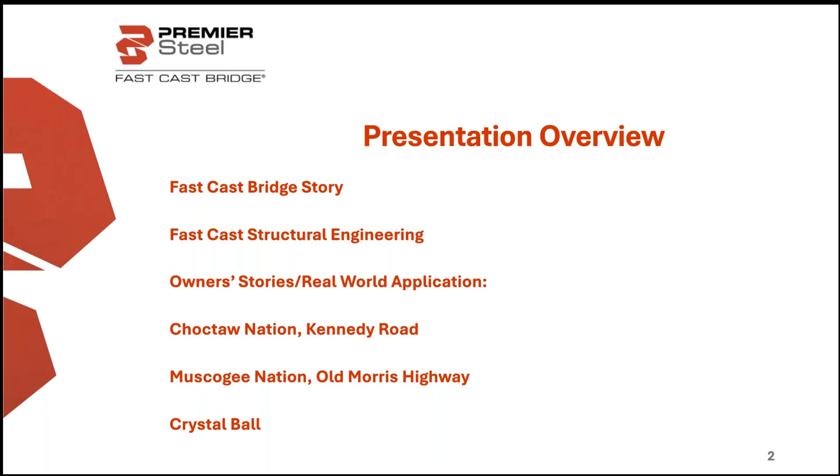Premier Steel Services was established in 2004. We're an AISC certified fabricator that specializes in multi-story construction and composite frame construction across the United States. We're also NQA-1 compliant and have worked at nuclear labs for the duration of our existence. We have federal government experience in national labs, commercial, and tribal projects nationwide. We started in a 43,000 square foot facility and are now up to 120,000 square foot with approximately 40 plus employees. Chris, you want to introduce DCI Engineers?

Yes, thank you, Andy. DCI Engineers was established in 1988, founded in Seattle. We now have a national footprint with offices across the United States. We are a structural and civil engineering firm doing services throughout, including niche services like heavy industrial, right-of-way, and sustainability. We have both a building division and a bridge division.

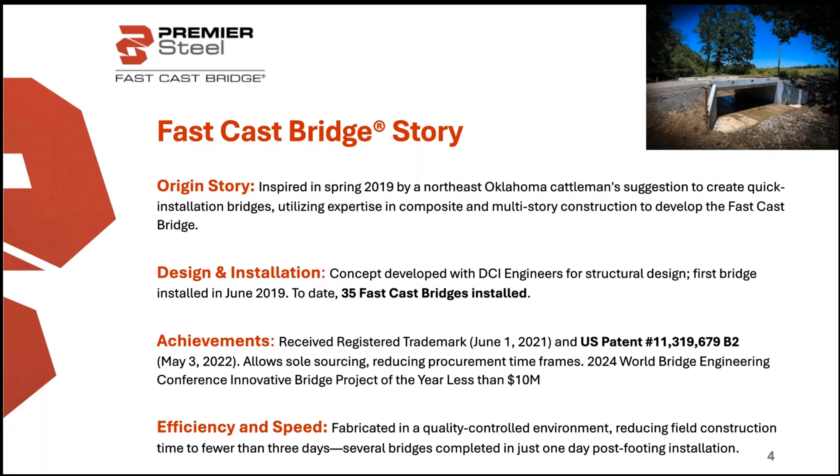So what the fast cast bridge is, in layman's terms, it would be a flying steel form system that stays in place, where you get the speed and performance of steel, the tolerances of steel, and the performance of concrete together.

We partially precast the tub girders to eliminate the necessity of shoring, which the walls will support. Because we're modular in our design, we can add bike and pedestrian lanes, varying edge conditions, water gaps. We've partnered with Green Frog Solar and now offer solar street lighting packages. One of the unique things is we're able to do head walls or wing walls, and angles don't really bother us—it's just a degree on a press brake.

Our steel outer shell basically protects the concrete from any environmental damage, including spalling. We're coated with a 20+ mil polyamine epoxy, providing approximately 30 years of corrosion resistance, but you can go in and touch it up. It's an immersion paint system, meaning it cures underwater, and it's meant to be underwater. We have multiple additives—it's actually a Sigma Shield 880 PPG coating. We can add anti-graffiti additives, and we're able to cover a variety of paint colors for different counties, states, etc.

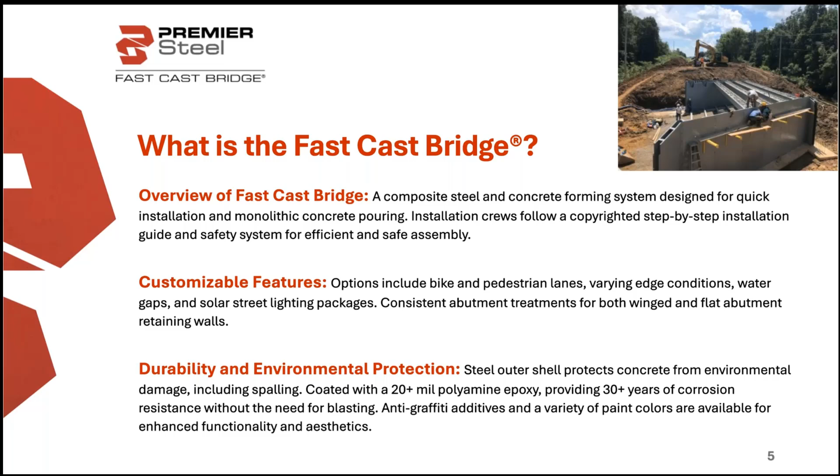The bridge design that Andy and we came up with was again a modular approach. The whole idea was speed, getting this in and out fast in design. So designing that, you need to modularize your design. We came up with spans of 20, 30, 40, 50, and 60 feet. These are all single simple spans that we're going to do, and we try to keep them all the same, fitting everything within a box. Again, the essence is speed.

Everything, bridge decks and beams, use conventional mild reinforcement, so we're not using any pre-stressing. We don't have to worry about any of that, and we try to keep it that way to make things simple, using regular materials that we currently have.

Bridges are designed for various loading categories. Every county, every state, every jurisdiction has their own requirement, and we have to meet that. We have a base design using AASHTO LRFD HL 93 loading and regular vehicle loads, and we can adapt that to whatever specialty need you have, whether it's added superimposed dead load or added specialty trucks, permit vehicles, etc.

As Andy was saying, we partially precast the tub girder, again to eliminate any temporary shoring, for speed of construction. Another idea is that we go through all bolted connections.

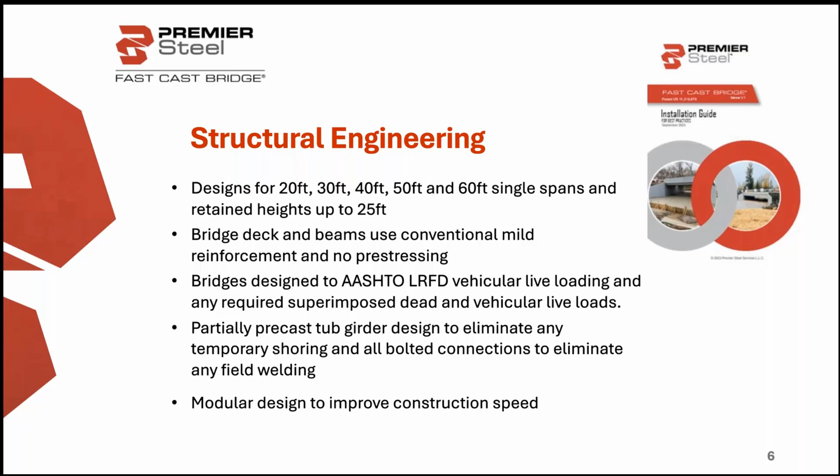Yes, thank you. We do add the intermediate abutment to go for longer spans when needed. And then you also have the bottomless bridge—we are doing ones that do not have a base.

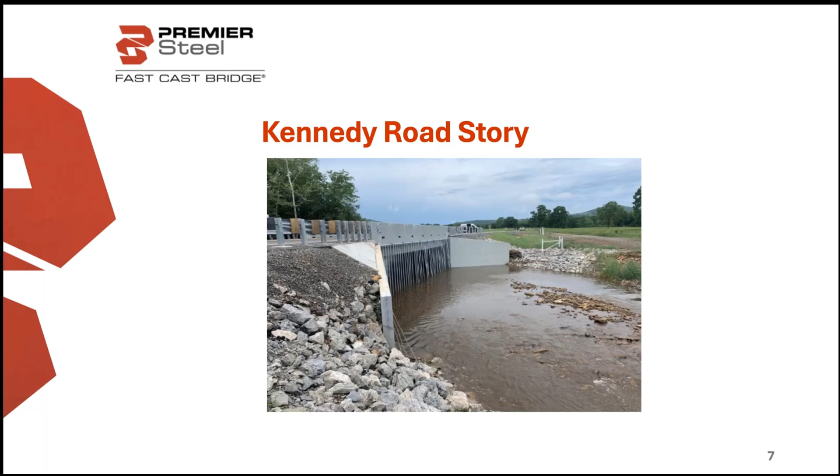The original bridge here was built around 1930 and was on the brink of being condemned. This road was a school bus route, access to 2 rock quarries and many cattle ranches.

When we went up and inspected the bridge and saw the condition of it, we immediately acted with our tribal transportation funds. We were able to go ahead and start progress on getting the bridge design built.

We hired an engineering firm to do all the civil engineering work on the project. Once the hydraulics was done, we turned it over to Premier Steel to get us a design and an estimate back. We actually signed the contract around the 1st of August on this project in 2023.

We started moving forward. We got our general contractor on board. He happened to be a local contractor that actually was the winning bid.

We worked with the county commissioners hand in hand, and we got this thing designed. Andy and them with Premier had it designed within a couple of weeks. We turned the design back over to our civil engineer.

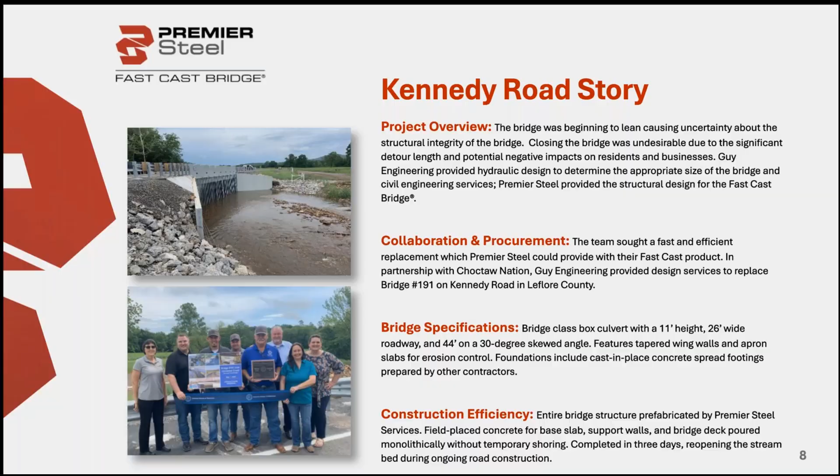Here's the designs, the plans that we received from Premier Steel. As you can see, they're very simple.

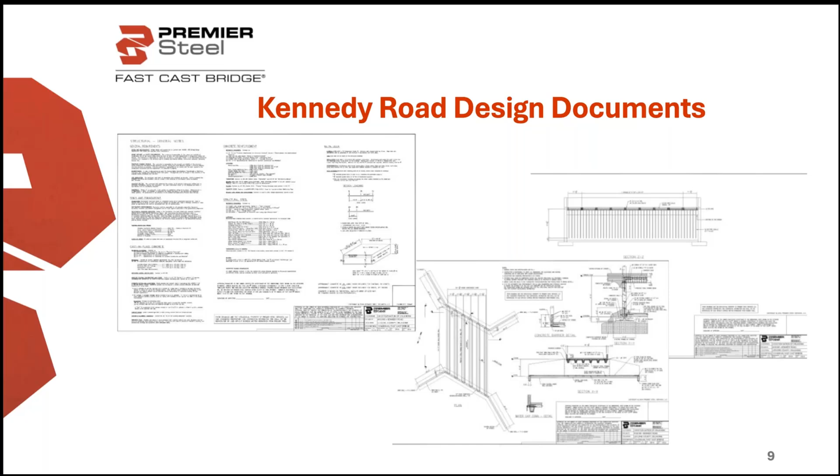As Chris was saying, keep it simple and it'll speed up the time. It did speed up the whole project. We actually cut our construction time by half of what it would take on a normal cast-in-place bridge.

After we got the bridge poured and set in place, our cattlemen in the area have all come by and looked at this, and they just think this is one of the greatest things that ever happened. They like this design. Matter of fact, I think they've even talked to the county about doing something like this on existing bridges.

The contractor, once he got finished with this, the first thing he said to me was, 'We want to do more of these.' So we're working on trying to get more funding to do more bridges in our reservation area. And Premier Steel—I'll be honest, we looked at other bridge packages, but they just didn't fit the need that Premier Steel provided to us.

We're very satisfied with it. We're satisfied with the time savings, because it cuts down on detour. The detour around this project was about 14 miles. We've also got a couple of rock quarries whose semis come across this bridge on a daily basis.

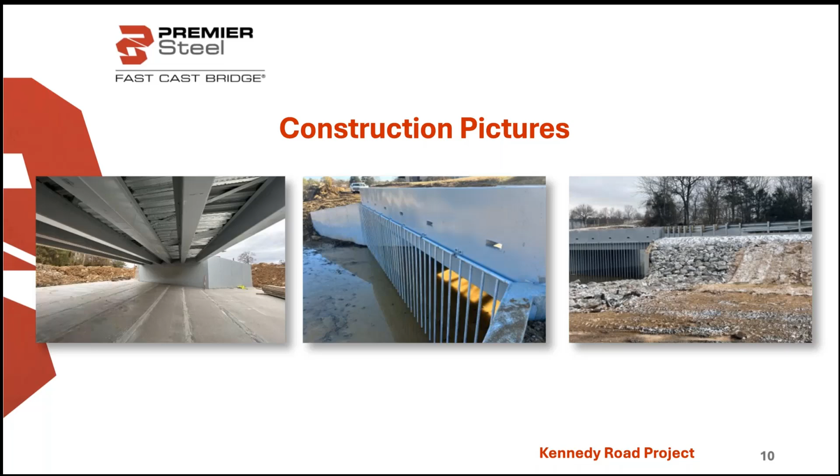I could go on and on about how well this thing has performed for us, and we're doing more projects with it. We think it's a great product, and like I said, we will be using more. Right now we've got a couple of the head walls sitting on the ground waiting to be installed that they designed for us. Back to you, Andy.

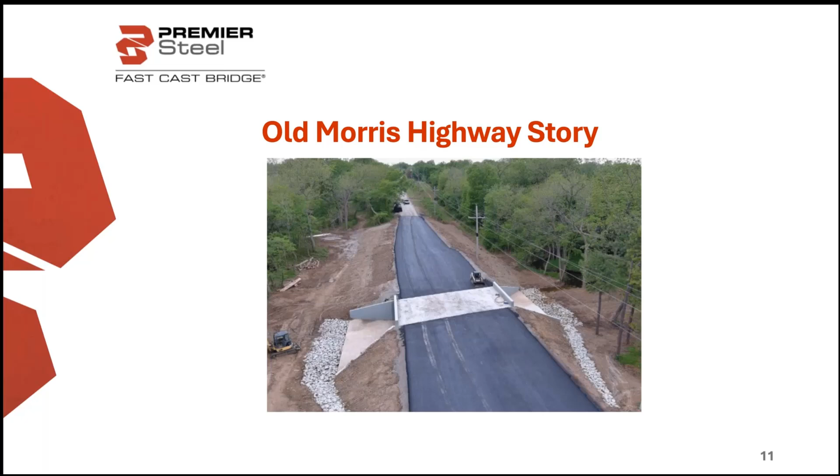I'm going to talk through the Old Morris Highway story. We had some flood events that washed out a multi-culvert structure within the Muscogee Nation reservation boundaries. The Muscogee Nation has bought in excess of 9 fast cast bridges from me at this time. They contacted us and asked us to work with their civil engineer to replace what was a failed multi-culvert project.

We ended up working with Cross Timbers Consulting, and they designed a bridge-class box culvert, 42-foot clear span on about a 30-degree angle, with a 44-foot wide roadway and TL4 crash barriers on the outside, as they were planning for future road expansion.

The entire project, beyond the foundations, was built by their selected contractor. Once they bid it out, it was put together and poured in 2.5 days. You can see a general set of the design documents and the drawings that we were able to do with the fast cast bridge.

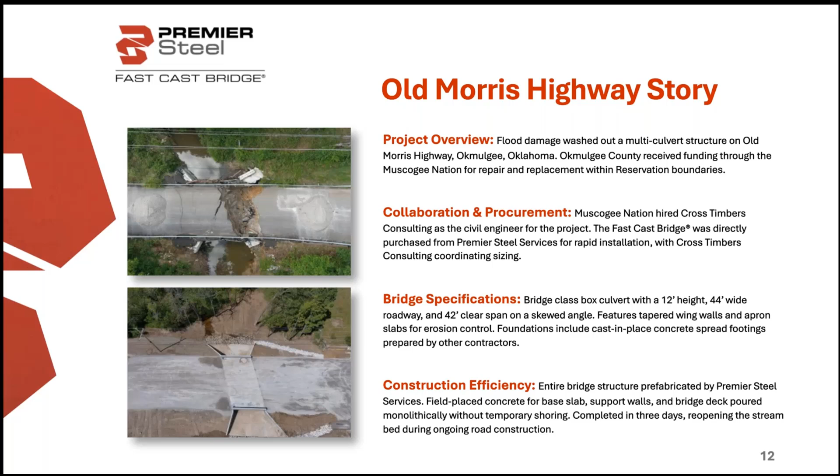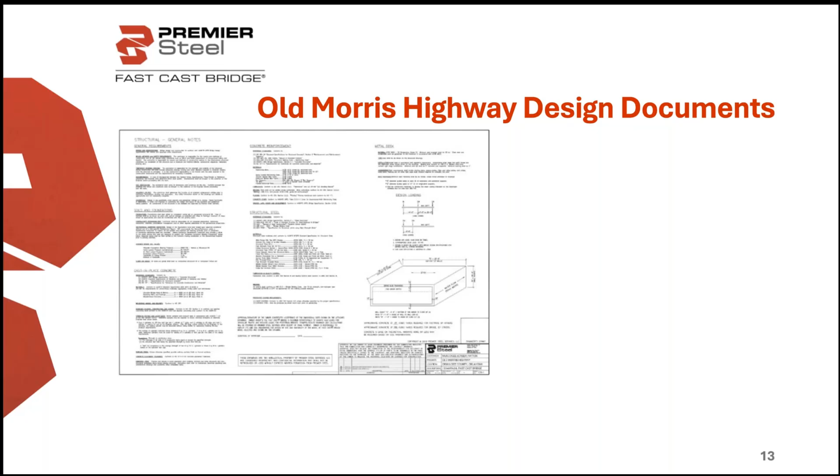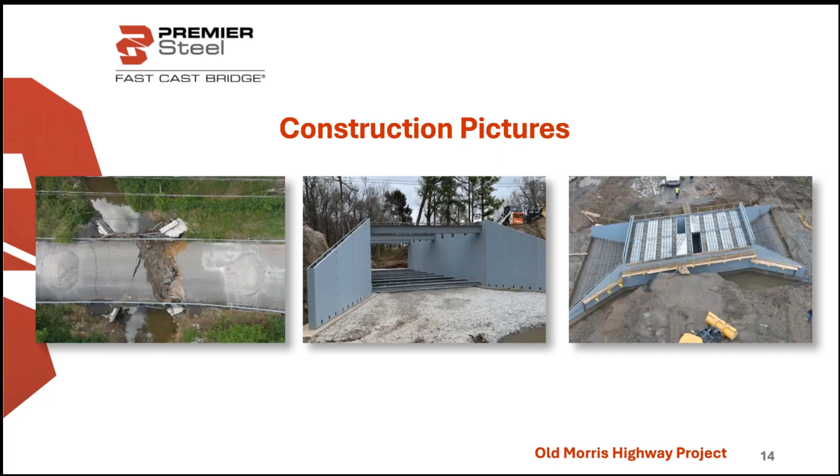And we were able to accommodate the different angles of the abutment protection wing walls at each end. This shows some of our walkways, and unfortunately the contractor was moving so fast he didn't put up all the walk boards he should have. It also shows how he forms in the scour elements or the curtain walls.

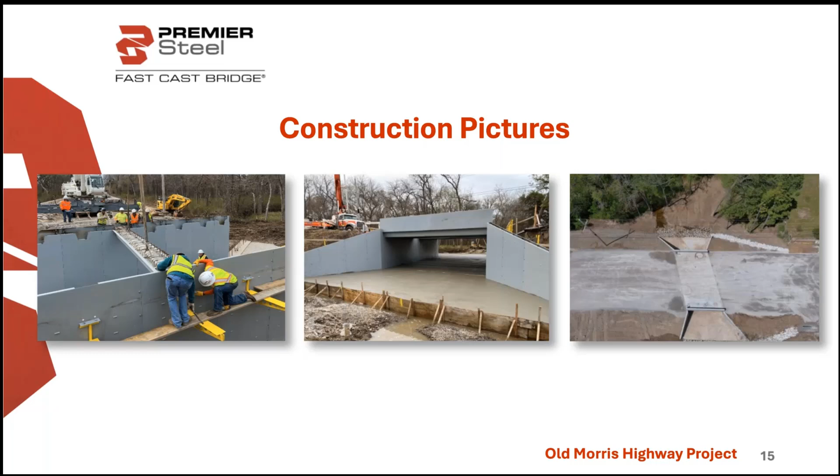And that was the Old Morris Highway story. I'm going to talk about the fast cast product suite.

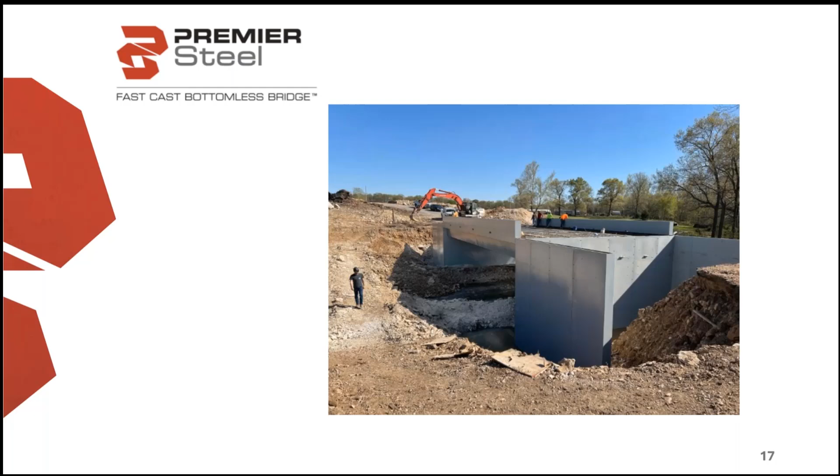As Chris alluded to earlier, not only do we build bridge class box culverts, but we also build bottomless bridges. Jim was talking about our fast cast culvert ends. We're able, for scour mitigation, to accommodate from 12-inch culverts to 12-foot culverts. We can also accommodate arch structures, ovals, squares, etc., to have a cast-in-place culvert that allows for scour mitigation.

We also have the pedestrian guards, or as an engineer told me out of Kentucky, a refrigerator guard. I asked him, what's a refrigerator guard? And he said, that's those pipes they put on the end, so when the creeks get full, the refrigerators float up and land in the middle of the road.

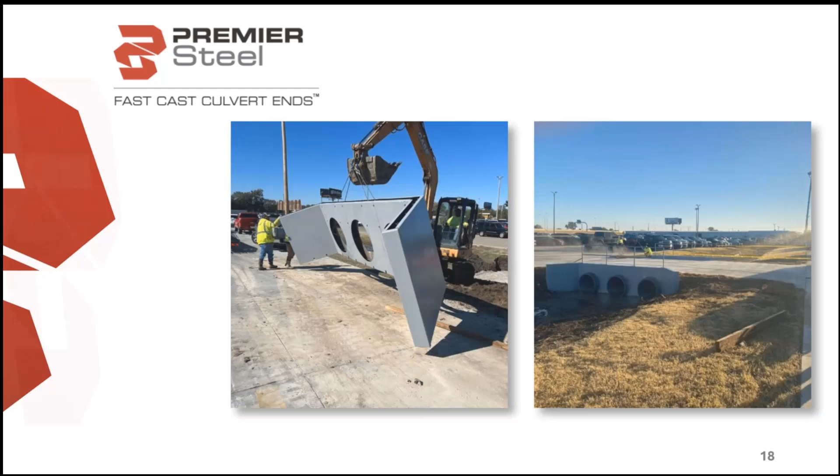We do have the ability to add different elements to our bridges. As Jim talked about, water gaps, we're able to put pedestrian lanes and rails on, solar lighting packages, different edge conditions. We're pretty agile at being able to meet our customers' needs and the local design professionals at what they need to accommodate for their design.

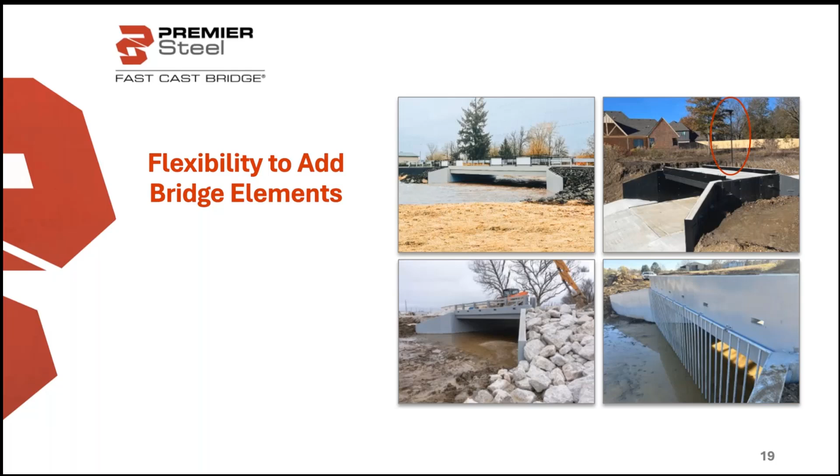Kind of that crystal ball we're talking about and where we're going. Premier Steel has developed a pricing application. We're at Gen 2 in it, and because we're steel and almost a commodity, it's how tall, how wide the roadway is, what the length of span is, and how many miles it is from Tulsa, Oklahoma, is how we price and generate proposals. It takes us approximately 2 to 3 days to provide a budget and a set of design documents for the local design professionals to work into their designs.

We are moving towards, in that crystal ball, a graphic user interface sometime in the future where we'll be able to credential engineering groups so they can go in, select a bridge type, fill out some dimensions, request a proposal, and get full-blown design documents and a proposal back to help make their jobs more efficient and easier.

So what we wanted to do, and we're seeing this, is take an innovative design approach. In other words, let's not reinvent the wheel each time, and let's make our designs very agile to be able to adapt and change for the different environments, state requirements, county requirements, municipal requirements, and provide tools to the local design professionals to make it work faster.